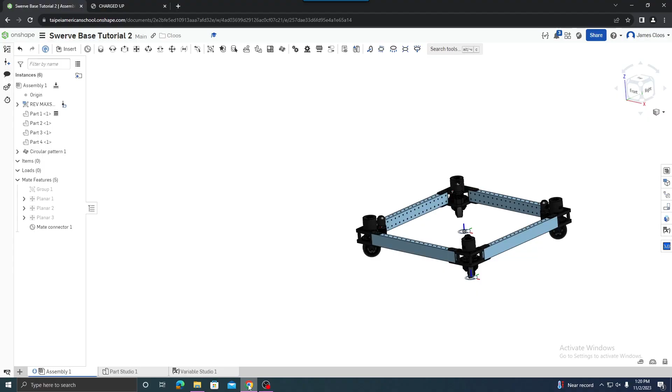Right, for the next tutorial, I'm going to add bumpers into this CAD so that we can make the bumpers, and also so that we have accurate geometry if we're trying to make an intake or something like that. And the most important thing that you can do when you are starting to design bumpers is to RTFM. Every year the rules are different, and bumpers are particularly hard to change, so if you make them wrong and you show up at a competition, there's a good chance that you're not going to be competing.

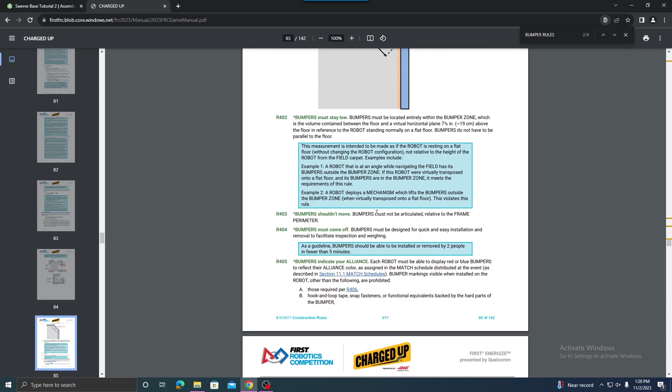So I am going to search the manual for bumper rules and jump down to section 9.4, and there's a couple of important pieces of information in here that we need to look at. First being this bumpers must stay low rule, is that the bumpers cannot be more than 7.5 inches above the floor. So that's one thing to keep in mind.

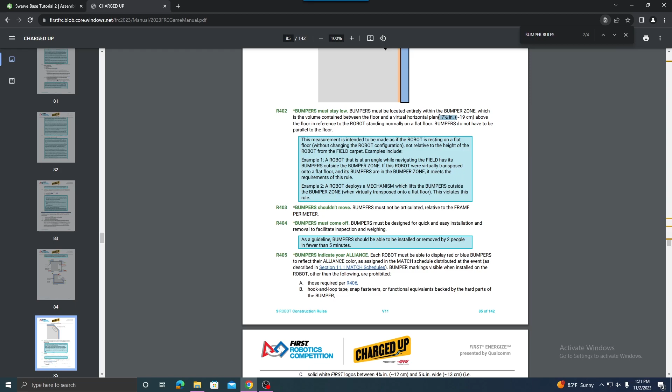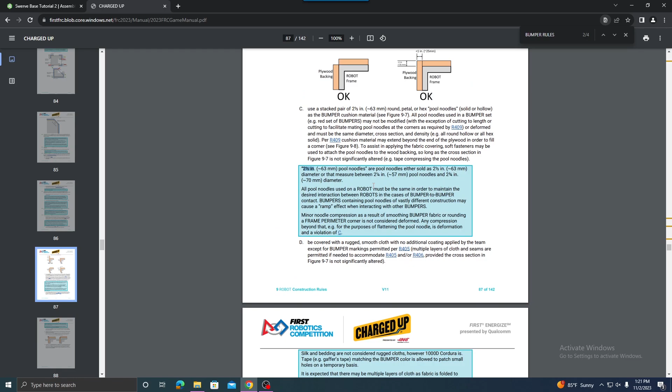Other things that we need to consider are the bumper construction. Our bumper should be approximately 19 millimeters, but this is going to depend on what kind of wood you have. They need to be 5 inches plus or minus half an inch tall. I'm going to make mine just 5 inches exactly, but there's some wiggle room there. And that should be about it. The pool noodles are approximately 2.5 inches, but I'm going to be focusing on the wood today.

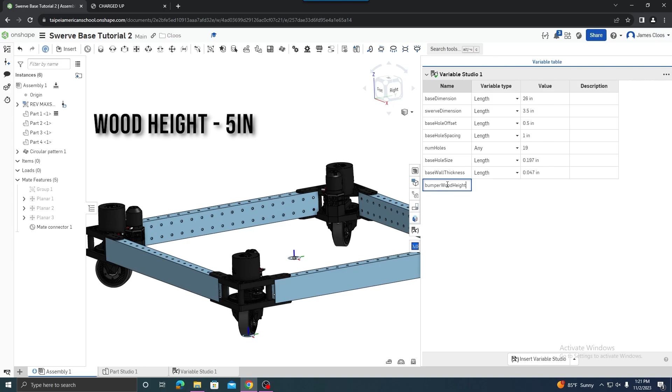So going back to our assembly, I'm going to make some variables over here. The first will be bumper wood height. That'll be how tall the bumpers are. Bumper wood height. Oh, I already had it. 5 inches. Next, I'm going to do bumper wood thickness, which will be, in our case, I went upstairs and measured the wood, and the closest that we have is 18 millimeters. I think that will be just fine.

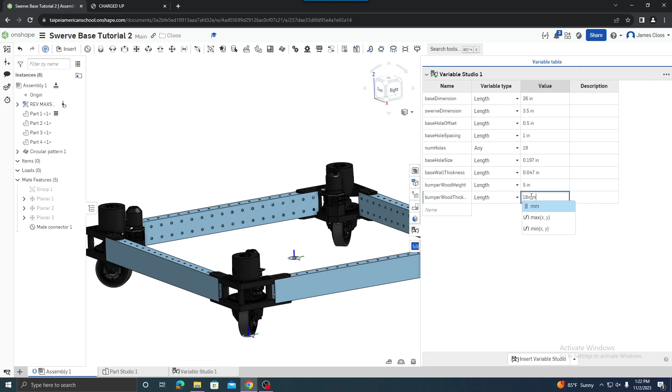And then I need to know kind of how far from the floor to the bottom of my bumpers, which I'll call bumper floor offset. I'm going to try 1.5 inches for now. This will be adjustable, so I can always come back and change that.

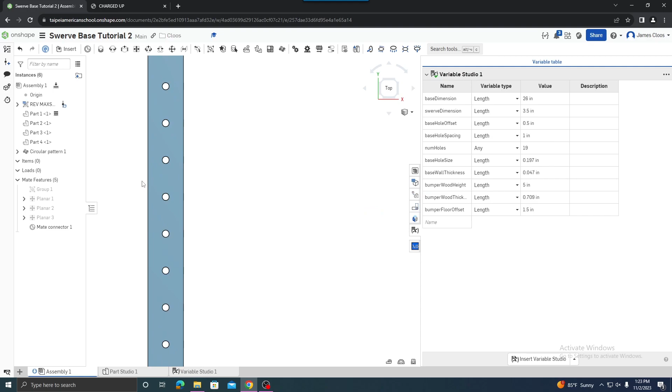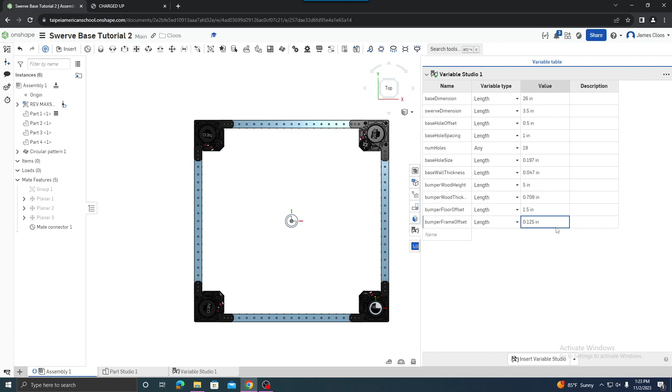And then finally, we don't want to make our bumpers the exact size of the frame perimeter. That may seem counterintuitive, but because we have to wrap cloth around the bumper as well, we need to leave a small gap in between the outside of the frame perimeter and where the bumper starts. So I'm going to call this bumper frame offset, and this we can play around with, but I'm going to set it to 1/8 of an inch for right now, and we can always change that if that's too big or something like that.

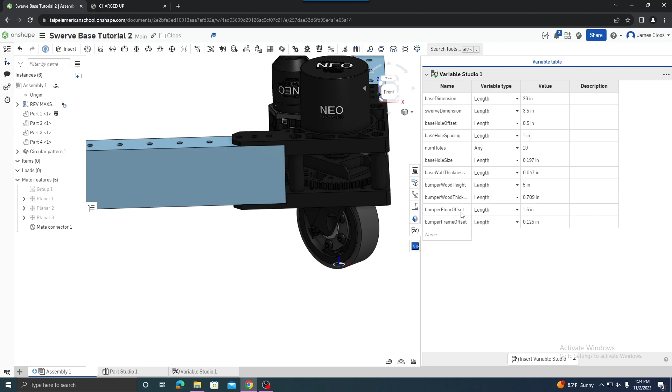Okay, so the other thing that we have to consider here is that we need to know where the floor is. If this robot's sitting on the floor, how do we find that information? And Onshape, thankfully, on the bottom of the swerve modules has a little mate connector here that tells us where the floor contact point is. So we're going to be using that. I'm going to make a new part studio now with reference to the floor, so that we can use this bumper floor offset to set the height of our bumpers.

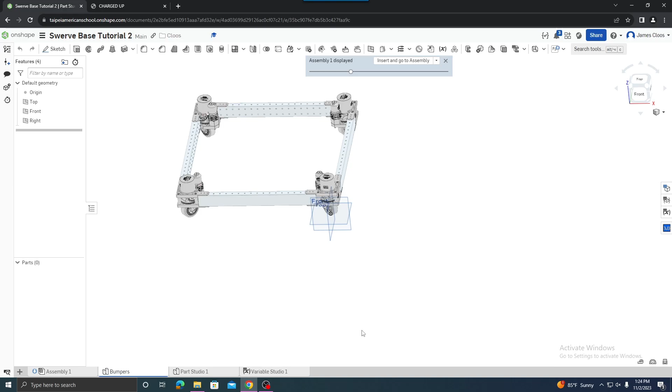So I'm going to right click on that mate connector. I am going to do create part studio in context, hit the check mark up here, and I'm ready to start. So I'm also going to rename this to make everyone's life easier. I'm going to call this bumpers. Alright, so the first thing, I'm going to just make a couple sketches so that I can use those sketches to make more sketches to draw the bumpers.

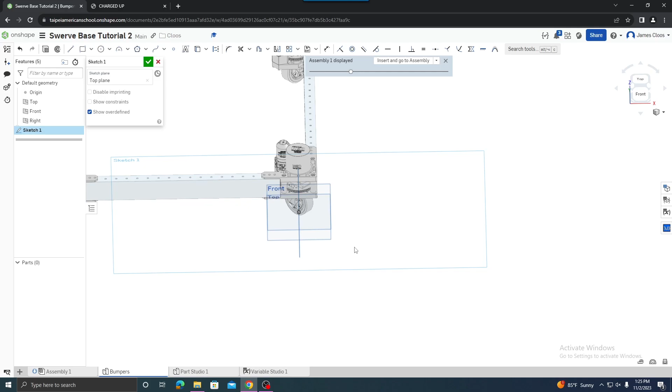So I'm going to start a sketch on this top plane here. Now I could click here to look at the top. I could also just hit the N key to look at the top of my drawing. I'm going to add a rectangle right now over the top, and this is going to represent where the inside of my bumpers are, and I'm going to dimension this now using the D key. This distance will be bumper frame offset.

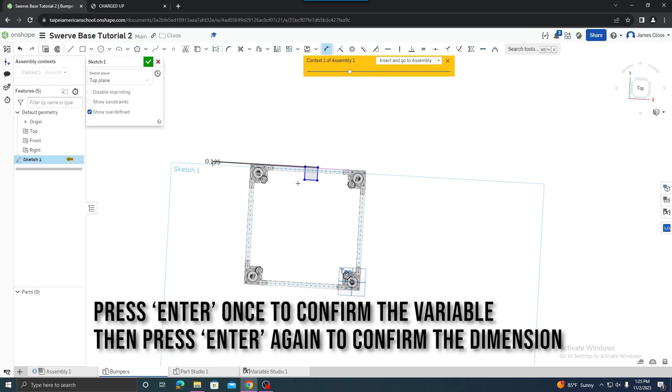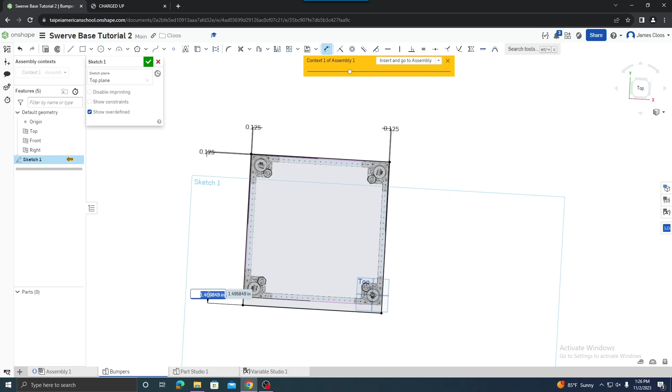Alright, I need to resize my rectangle now. And I'm going to just keep dimensioning all around. Bumper frame offset. Bumper frame offset. And the last one, bumper frame offset.

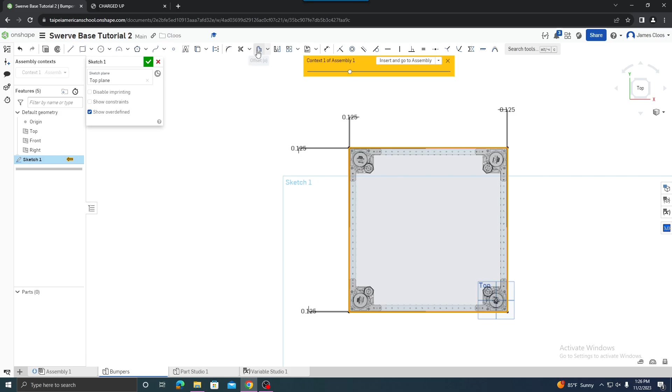So if I'm looking at this from the top view now, there should be a slight gap between the box channel and where my wood will go. Next up, I'm going to select all that I just drew, and offset it using the offset tool, or the O key.

This is important because of the way we're slotting our bumpers together. If our wood is 19 millimeters or 18.5, we want to know that exact distance so that it fits together nicely, or else they won't be very strong.

This sketch represents where my bumpers will be, but I don't want to start extruding this yet. I need to actually draw from a side or front view, so I'll go ahead and exit this sketch by clicking the check mark.

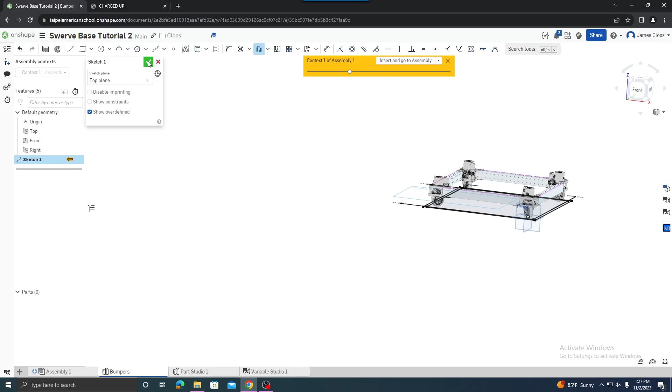I'm going to make a new sketch. I'd like to sketch on that 1/8 offset area. I don't have a plane for that, so I'm going to add one in. I'll select the plane tool here. By default, I think it is mid-plane.

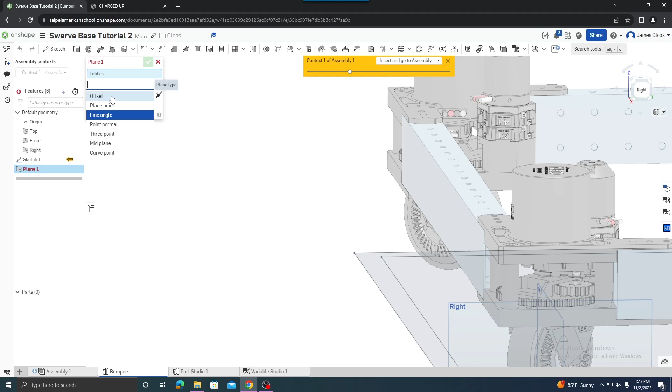We want to switch to line angle, and I can select this line here. You'll see that added a plane that is offset that 1/8 of an inch. So I'll go ahead and hit the check mark and start a new sketch on this plane.

Our bumper basically is going to look something like this, so that it can slot together. But I'm going to break this up into multiple steps. So I'm going to start. Let me delete all this now.

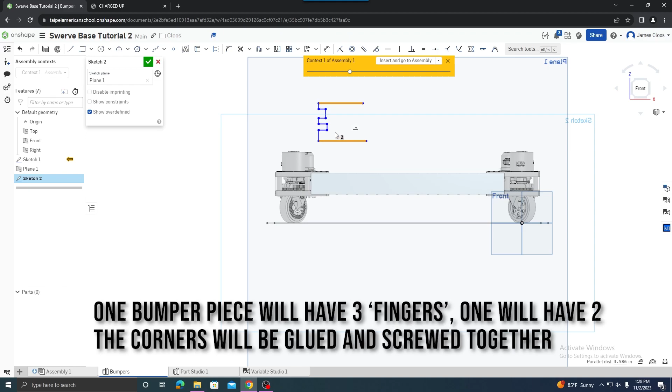I'm going to start by just doing a rectangle, and then I'll draw those fingers on. So drawing a rectangle here, I'm going to add my dimensions, starting off with from the floor - this will be bumper floor offset.

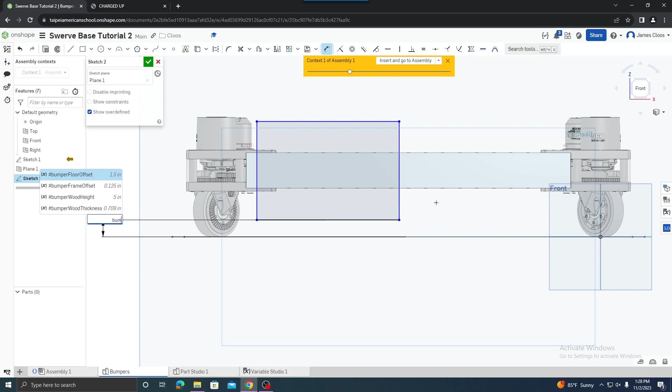That will set the bottom of our bumper to be the right height off the floor. Next, I'm going to add the height of the bumper here - so that will be bumper wood height.

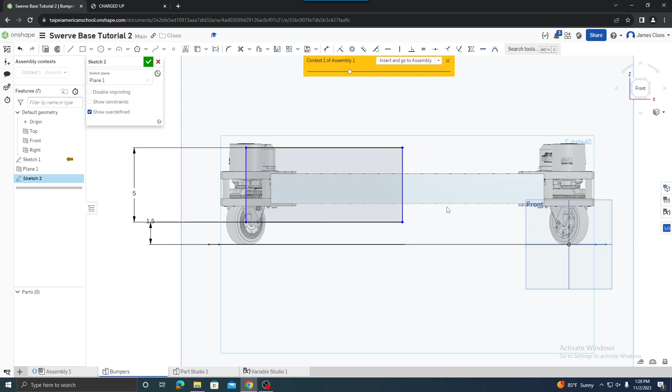Next, I need to place this bumper in the center. I should have said I'm doing 4-part bumpers, so each corner is protected by a bumper.

One way to do this is I can find my midpoint here by hovering on this line. I will find my midpoint. I can select the bottom point of my bumper, and I am going to make that vertical, pressing the V key. That's good. Now the other question is, how far over does this go?

I'm going to also use the vertical command here by selecting this inside corner and the bottom corner, hitting the vertical button, and I have my nice bumper set up.

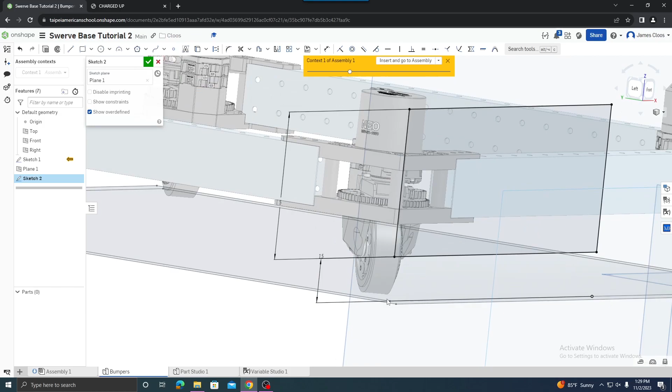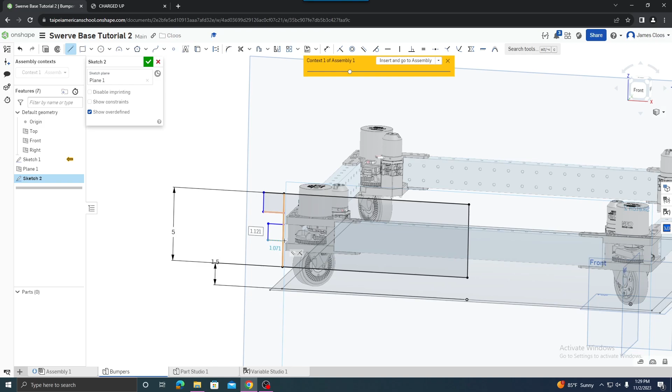After this, I'm going to add my teeth in here. I'll do this kind of sloppily first, and then go in and add my relations. So I'm just going to draw my 3 boxes. You could also use mirroring here, but I'll do the full step.

So how do I get these all black before I proceed? I'm going to select my 3 points here and make them vertical to each other. Next, I'm going to select these 3, and make them equal to each other - I could use the E key there.

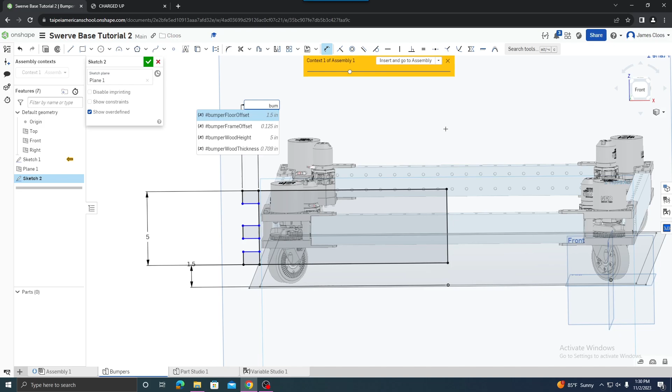I'm going to start adding some dimensions. I'm going to dimension this to be - I'm not going to type in 18 millimeters here. I'm going to type in bumper wood thickness, so that in the future if I change this it will automatically update.

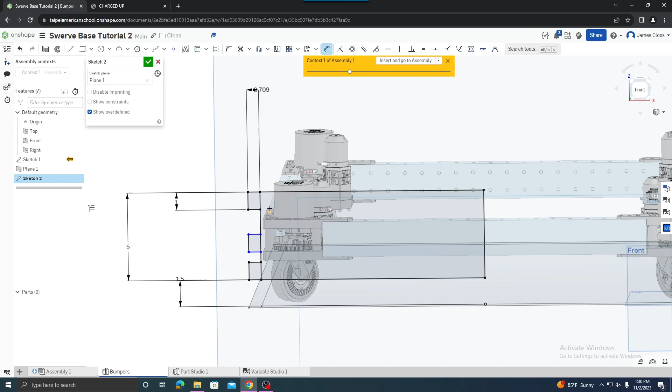Great, and so we're almost here. I still need to set the height of these, and this I can say bumper_wood_height divided by 5. Why 5? I have 1, 2, 3, 4, 5 total spaces.

The last piece of the puzzle is I need to get this centered. There's a bunch of different ways I could do this. One would be I could add a point in the middle of this.

And then I could find, okay - add a point over in the middle of this as well. And then I can select these two and set them to be horizontal. That would be one way that works fine.

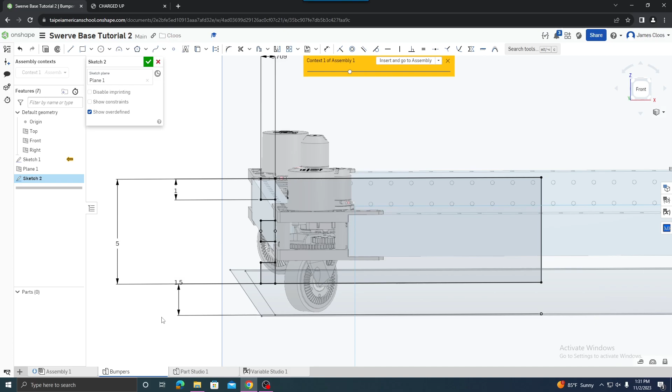Another way I could do this would be to add a construction line between here and here, and set these two to be equal as well. So both of those ways would work, or there are lots more.

Okay, and then to make my life a little bit easier, I'm going to use this trim tool, and I'm just going to cut out...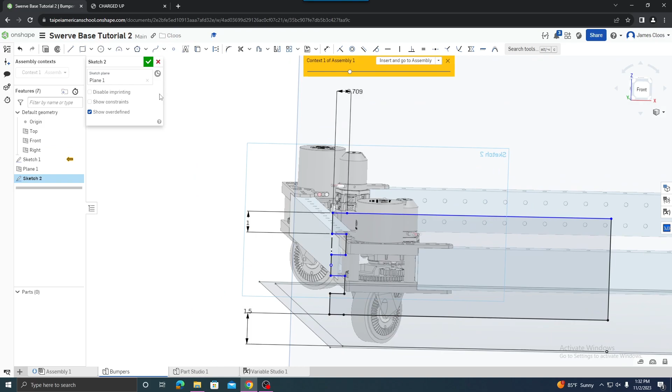Oh no, that ruined my sketch. Oh, it messed up the height. Okay, I'm going to reset that height then. I'm going to dimension this to this as bumper wood height.

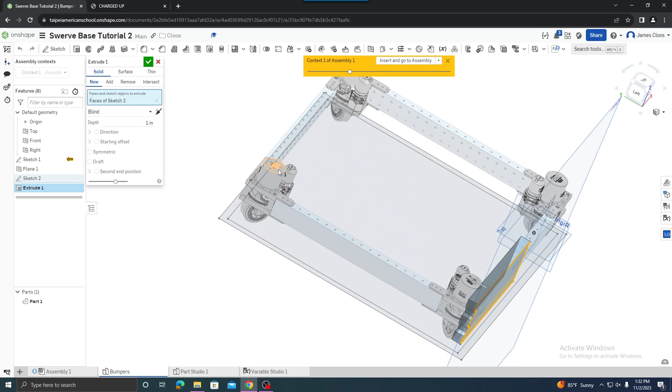All right, so that's all black now. I can proceed on. I'm going to extrude here. Don't want to go that way - I want to go the opposite direction, so I'm going to hit the flip button. And instead of 1 inch, I'm going to extrude it out bumper wood thickness.

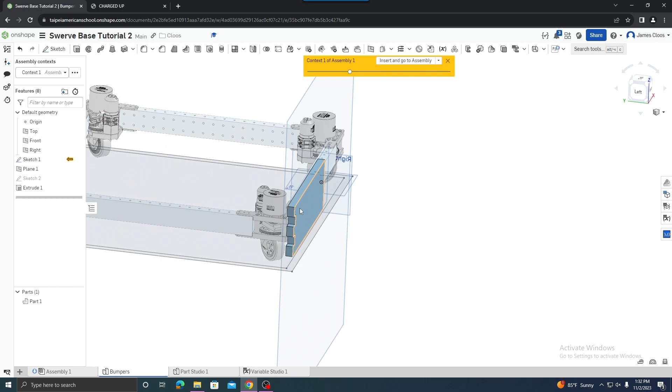All right, and I have a nice piece of bumper wood. I need to add another piece over here. This one's a little easier. I don't need to make any new planes. In fact, I'm going to hide this old plane by right-clicking on it and selecting Hide All Planes.

There we go. And for this piece, I'm just going to start a sketch. I'm going to start it on one of these surfaces. Doesn't really matter which one, but I'll choose this one. And for this, I'm going to just trace out what I want.

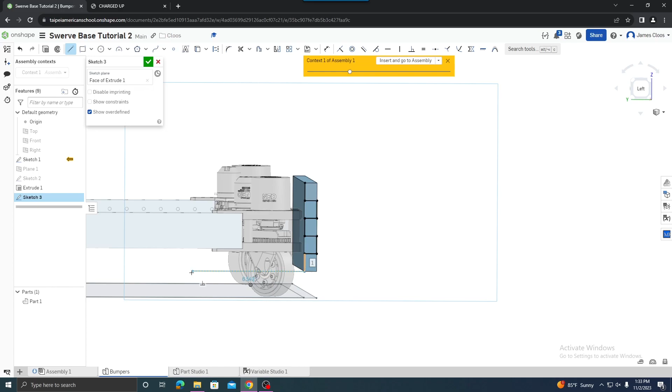So I'm going to go over here. 1, 2, 3, 4, 5, 6, 7, 8, 9, 10. I'm going to go over, up, making sure that I stay vertical and horizontal.

All right, and I'm almost done. I just need to get this over to the midpoint. So just like last time, I can select this, I can select that. I'm going to hit vertical. That would be one way to do it.

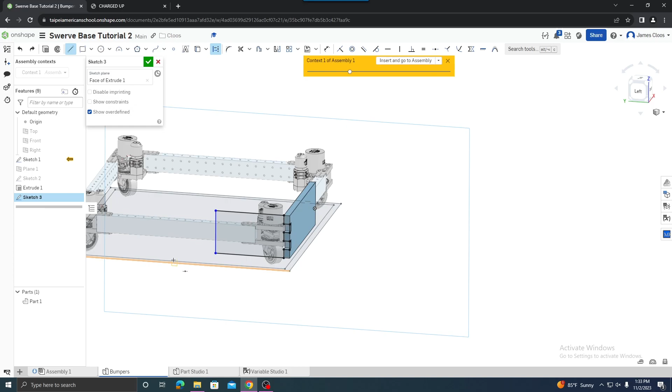If you wanted a little more tangible method, I could also draw a construction line from here to here, and I could set that to be vertical.

Or, you know, if for some reason you wanted a little gap between the two bumpers, you could also draw a vertical line here and then set some kind of dimension here. Like if you wanted a 1/16 gap so that your bumpers fit together nicer, that's also an option. I'm not too worried about that, so I'm just going to...

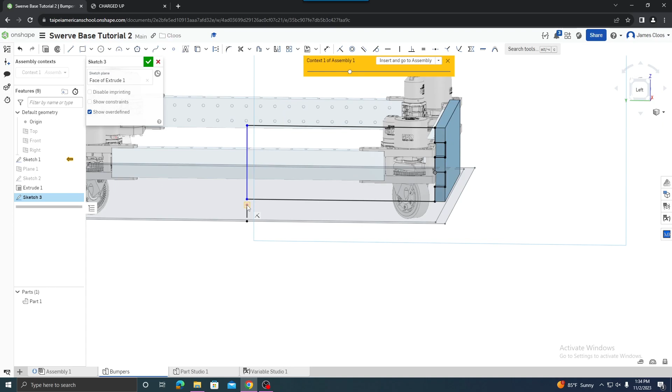Do it like that. All right, now that I have this, I can extrude. Note that I'll do up to face here and select that so that it fills it in. Note that I do not want to do the add option here, because that would make just one giant block and all of my work on those fingers would be ruined.

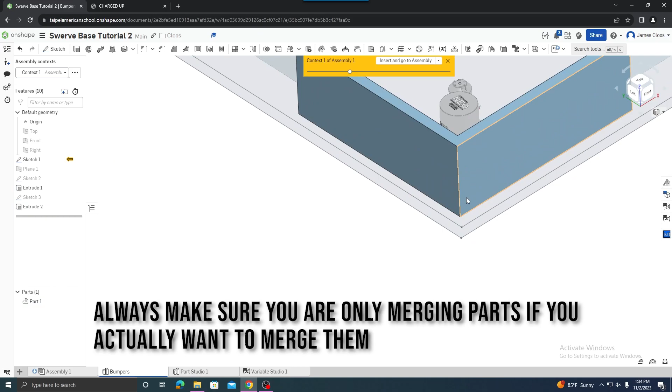I really want to do new, because these are two different parts. These are two different pieces of wood. Great, so these are almost ready.

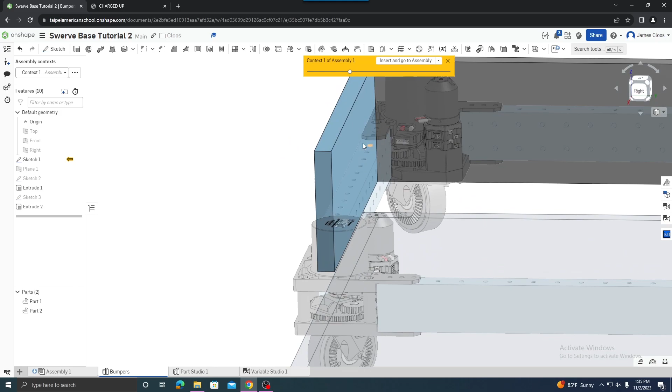I could rotate these around if I wanted to, but for right now I want to actually add in some brackets or some way of mounting these bumpers to the box channel. So let's take a look at that.

I'm just going to make kind of a dummy. I'm going to pretend like I'm bending a piece of metal or something to fit the bumpers. But you'll want to have some discussions about how exactly you want to mount your bumpers to the frame. It's important that they are durable and easily removable and repairable.

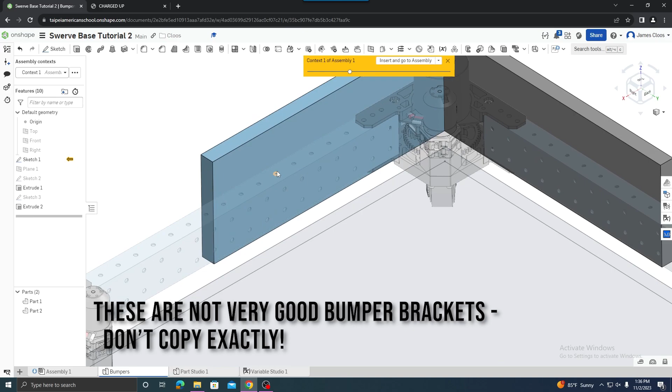But for this one, I just want to show you how I can add the holes in the right place on the bumper, depending on my bracket that I decide with.

So let's make a new sketch. I'm going to mount these using this hole here maybe. So I'll start sketching on top of here, and I'm going to just draw a rectangle around here.

To center this rectangle now, I'm going to draw a construction line from the center of the circle to the center of the rectangle, and I will make that - I want to say that's horizontal? No, not horizontal, vertical. This will change depending on which side you start drawing on.

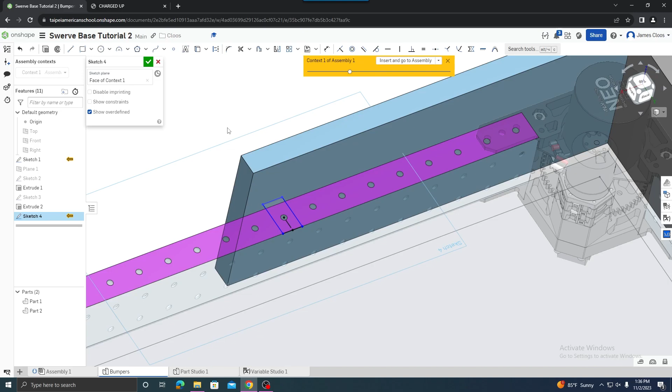Next, this line should probably go all the way out to the bumpers. I could do this point and this plane, and select pierce. Oh, maybe this point, this line, pierce? No, okay. So how do I get this out to the proper space?

I can make another sketch, I guess. What I will do for now, I don't want to spend too much time on this, is I'm just going to add this dimension. Here, yeah, I'll just add this dimension. I'm going to say 1 plus bumper frame offset. So that should adjust to be - oh, okay, it doesn't like 1, I'm going to say 1 inch plus bumper frame offset. Great, okay, it was a little awkward, but we'll get there.

Finally, I still see some blue, and that is because I didn't set my width yet, so I will come in here and say, hey, let's make this - I don't know, you should probably add a variable here as well, but I'll just say 1 inch. Why not? Okay, so I'm going to extrude this out now.

I'm going to pretend I'm making this out of 1/8 angle aluminum or something like that. So I'm going to extrude. You'll notice that it's not getting a hole here, so I actually want to delete these faces of sketch 4, and I'm just going to click specifically on what I want, which is here and here.

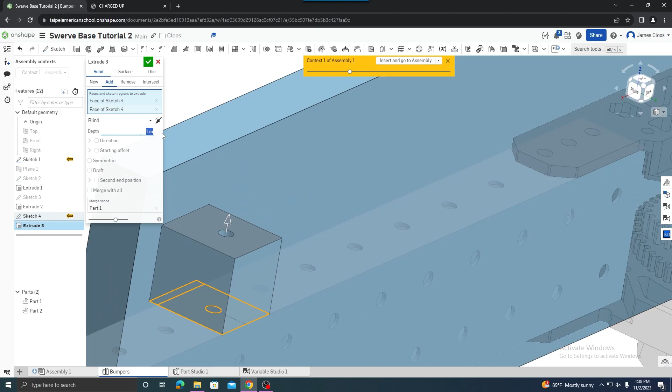Thickness, again, you probably want to set up a variable for this, but I'm not actually going to use these brackets, it's just for an illustration. Pull that up 1/8 of an inch. Great, and now for the vertical piece, I'm going to sketch on - I guess I'll just sketch on the bumper.

Oh, I think I made a mistake. I said add instead of new, so this became part of the bumper. I definitely want to go back and make sure that I selected new. It should be a different color in that piece.

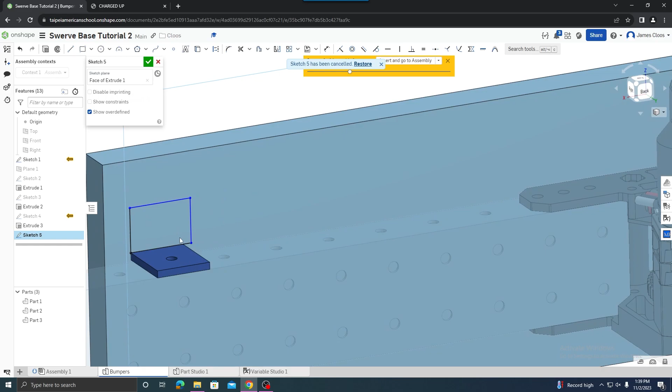Now I'm going to do another sketch on here. I will draw a rectangle coming up like that. This can slide over, so I'm going to drag it back until it pops into place. I'll set a height on this as well to be 1 inch.

I should add a couple of holes here. I could do this a couple of different ways, but I'll do it like this. I'm going to draw a construction line across here, and another construction line across here. I'll add a circle there and mirror that circle across like that. Finally, I can set a dimension here, something easy to remember, maybe like 5/8.

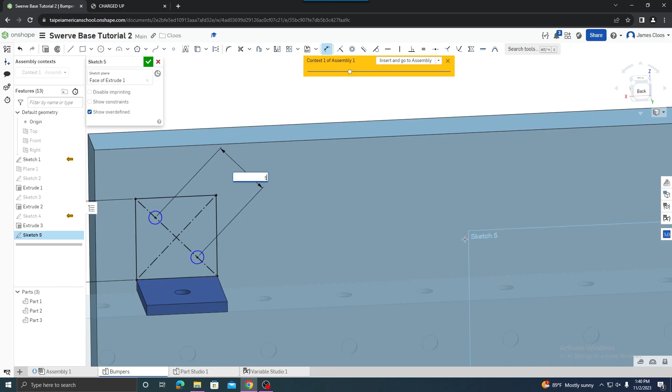The screws that we generally use are 4mm, so we use M4 bolts or M5 bolts, whatever, but that's a nice size. And then finally, I'm going to extrude this 1/8 of an inch.

Now, I would like this to join my first part that I made, but not the bumper. So when I go to add here, for my merge scope, I'm going to select just this bottom piece. Great, okay, so this is a pretty workable bracket.

I do need to add my holes into the bumper. One way that I can do this is, I'm pretty sure that I can just start a new extrude. I'm going to switch to remove to make sure that I'm removing material, and then I'm going to just click.

No, that's not going to work. Okay, never mind.

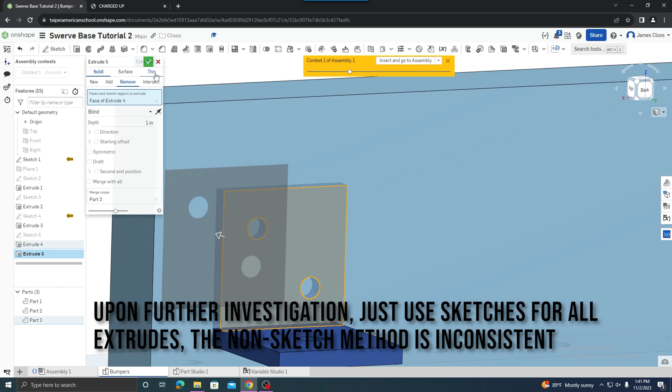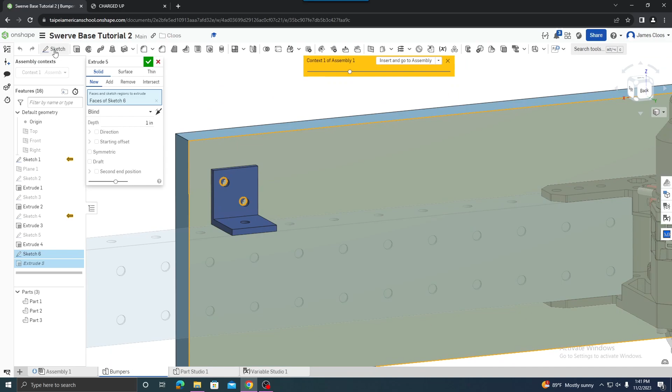Let's make a new sketch on the bumper. I'm going to select these holes and then press the U key. Those holes should be in there now. I can remove this by extruding, remove, and I'm just going to say through all. Hit the check mark. All right, and I am good to go.

For really strong bumpers, you'd want to have 2 mounting brackets on each side. For this illustration, I'm just going to do 1. I need to do the same thing over here for the other side.

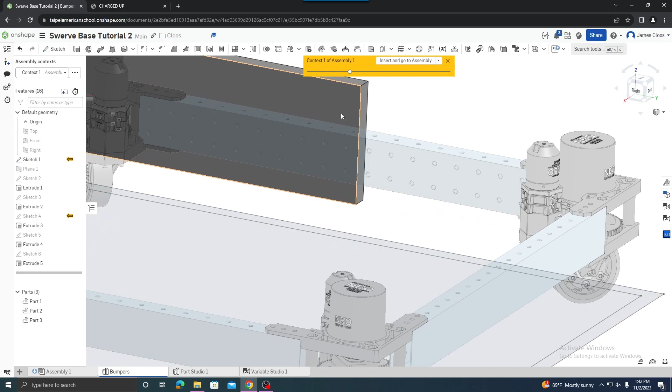It might be nice - I'm going to be a little lazy here. Instead of drawing this over and over again, I'm going to try mirroring them all over. So I'll show you how to do that.

Before I can mirror or rotate anything, I need to set up my plane. I'm going to go up here to the new plane tool. I'll set that up between these 2 box channels. I need to switch this back to mid plane. I'll get my plane in the middle.

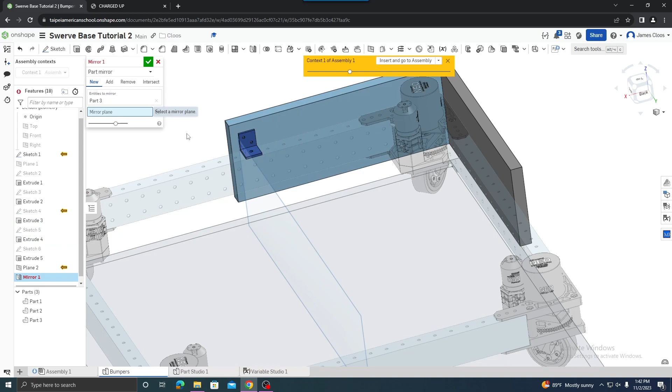Very nice. I'm going to now use my mirror tool here. I'm going to mirror this bracket across this plane, and that should line up nicely with the hole. Just double checking - yep, looks good.

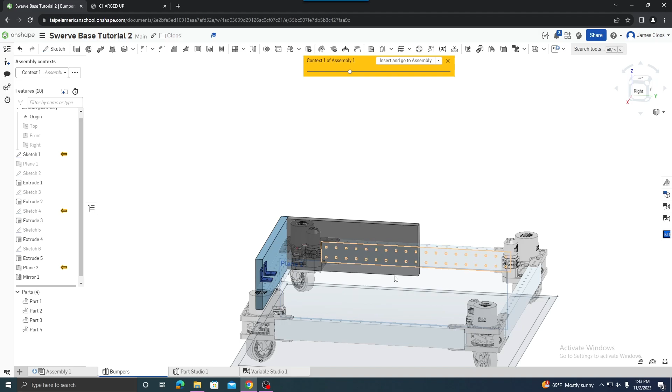All right, up next, because I have a square base, I could just rotate these around, so I'm going to do that real quick. To rotate, you need an axis, so I'm going to add that in the middle of my bot. Normally, we put that origin in the middle of the bot so we could do that, but because we started it from this part down here, I can't do that, so I've got to add that back in.

I'm going to make a sketch on this Plane 2, because I know it's in the middle. I'm going to make a line. It doesn't really matter where I put it, but I'll put that there.

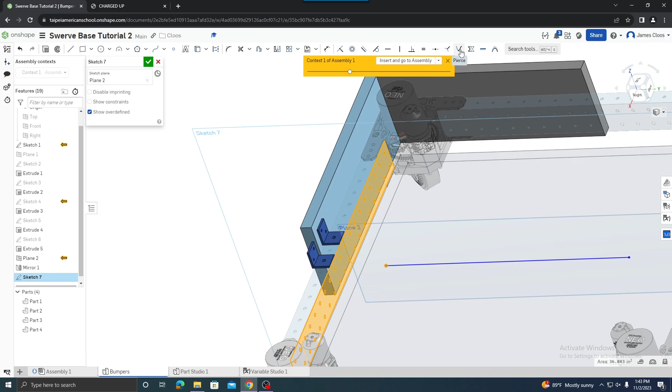I think I can go here and select pierce. That should work - nope, okay, that's not working. Maybe this bumper in this point, pierce. This and this coincident - ah, that worked. Okay, coincident, not pierce. I'll do this to the other side as well. I'm going to select this face, this point, make it coincident.

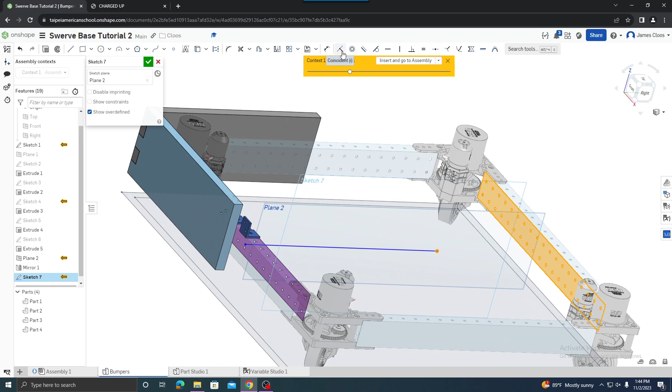Nice. And for the rotational axis, I'm going to find the midpoint here and draw my line vertical. Okay, I can exit the sketch now. I have my rotational axis.

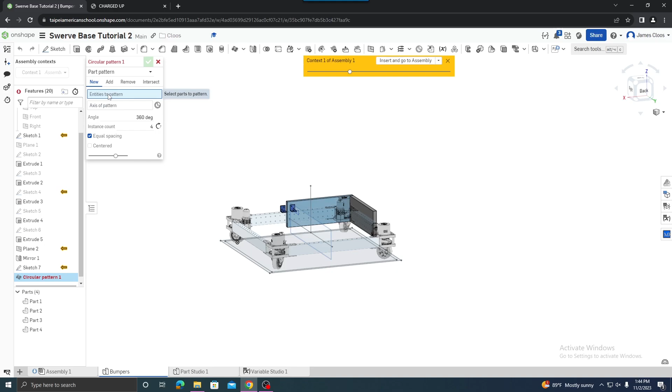I'm going to go up here to under linear pattern, circular pattern. Entities to pattern, I'm going to pattern my brackets. Axis of pattern will be this line. You can see that added in all four, or all 8 of my brackets. I'll go ahead and hit the check mark.

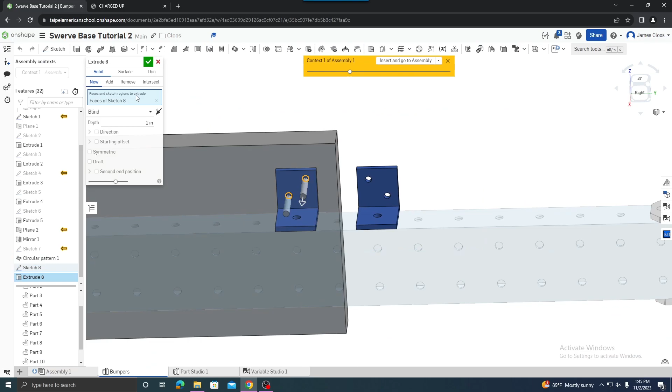Last step, I need to add in the holes over here. I'm going to make a sketch on this bumper and use these 2 holes with the use tool here. I'm going to make a nice extruded remove through all, and I got my holes in my bumper.

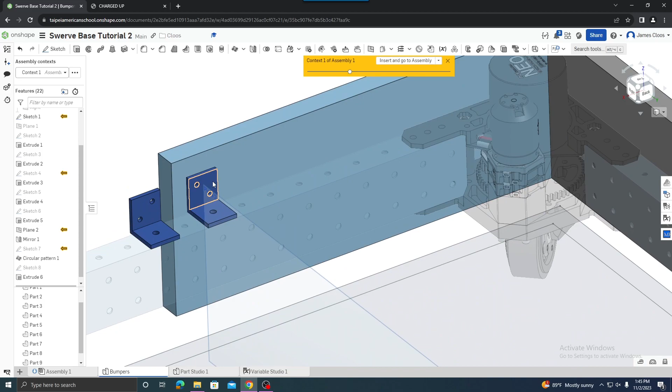If possible, you should really use 4 brackets per bumper if space allows. I'm not entirely sure about the placement of these so far out to the side. If you only use 2 per segment, more in the middle might be nice, so this corner is more supported. But that's a discussion for another day.

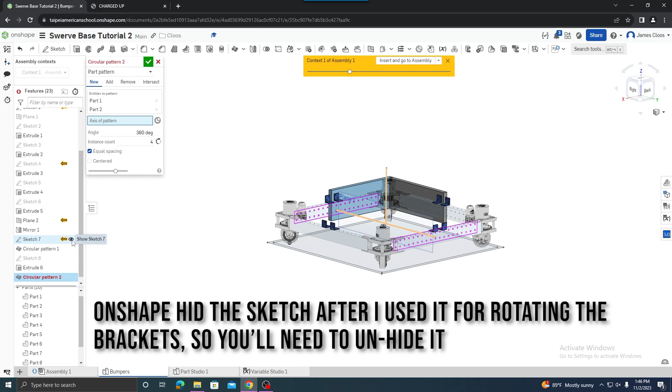Next, I am going to do another rotation of these wooden panels now that I have all the holes in them. I didn't want to rotate them before I put the holes in. So I'm going back up to my circular pattern, selecting my bumpers. My axis will be, it hid my sketch, so I need to show my sketch here. Now I can select that, and I have my 8 total pieces.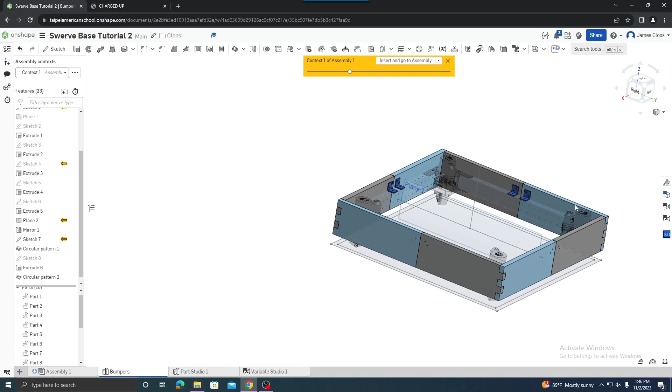Then the final step I think is going to be adding the pool noodles, but first, just to show you how nice this is now that I've set up all my variables. If I go back to my variable table, if I thought those bumpers were a little too low and wanted to protect motors or something inside, I could change this to 2 inches, and you'll see that raised everything up really easily.

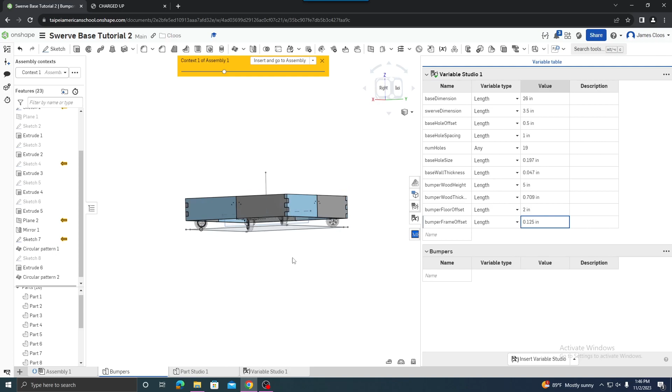If my wood was, I go up and measure it and it's actually 19 millimeters, like it should be. You can see that expanded it out now.

If my frame offset was too small, it's probably not the case, but just for illustration purposes, I could change that to 0.5, and you can see that just changed the whole offset, also changing the design of the brackets. So that's pretty nice.

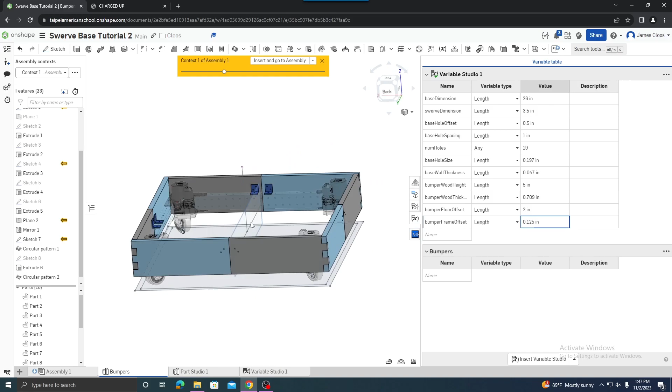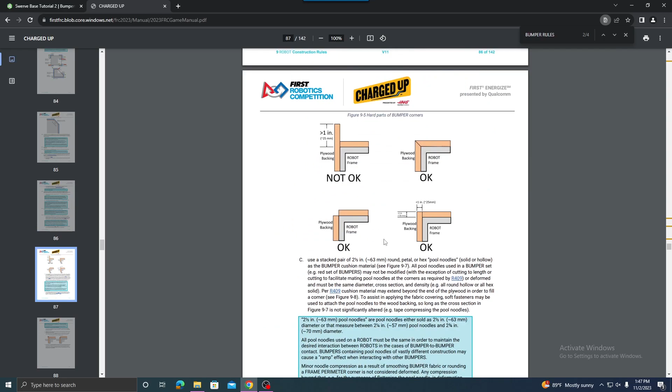Yeah, so that's pretty much it. Last step is I'm going to add those pool noodles. Like we looked at before, those are 2.5 inches, but again, always double check all of the official documents for each year.

And we're going to sweep those pool noodles around the bumper. So to do that, I'm going to make a sketch on any side, doesn't matter, but I'll do it over here.

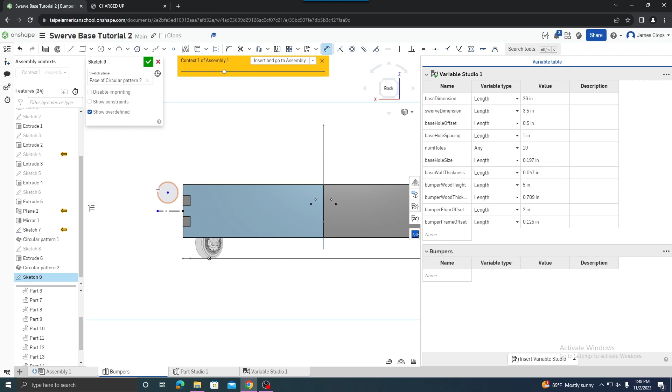I'm going to add in a line to make this symmetrical, and I'm going to add in my circle. I'll set that to be 2.5 inches. And I'm going to set my line here in my circle to be tangent, and my bumper and my circle to be tangent as well.

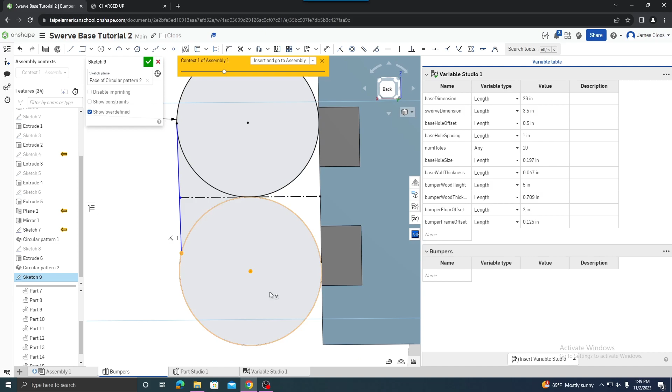Next, I'm going to mirror these over. I'll just add this so it looks a little bit nicer. Now I would like this to be all the way out at the edge here. I'm going to select this and make them horizontal from each other. Same down here, horizontal. Alright, and that should make a nice little bumper fabric that I can wrap around.

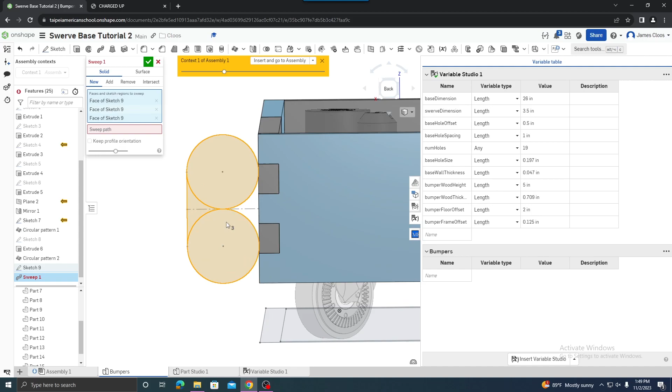To do this now, I need to exit my sketch. I'm going to hit the check mark and select the sweep tool. I am going to sweep my circle, my outside bit, and my other circle. The sweep path will be either of these two rectangles down here. So I'll go here, here, here, and here. And then I can hit the check. Alright, and that gave me these nice bumpers.

I can use these patterns here to make my DXFs to cut out on the water jet. Now that I've finished my bumpers, I actually want to put them into my assembly so that other people working on the bot can use them as reference and they won't steal my holes for mounting things.

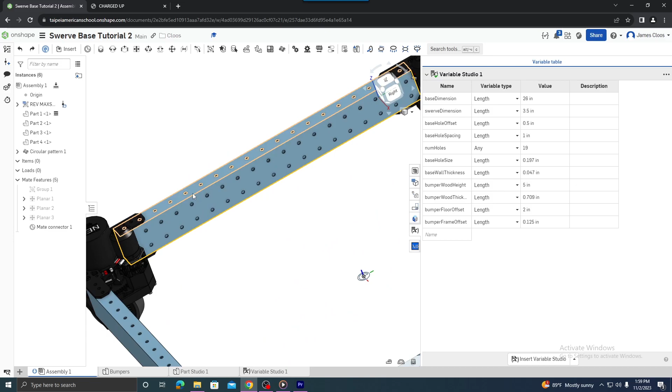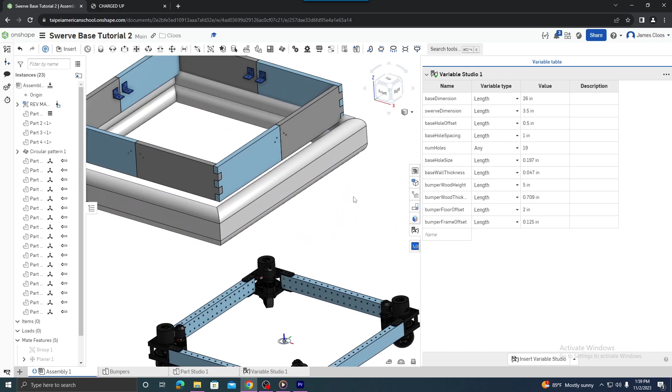To do that, I'm going to hit this insert button. I'm going to select bumpers, and I'll just put them somewhere convenient, not too close to the other things. The reason I'm doing this is because right now, even though I put these in here, they're still flexible. They haven't been fixed together.

So one thing I can do is select everything. I'm going to search for the group button here, and then I need to hit the check mark. Make sure you hit the check mark. Now it's a functioning unit.

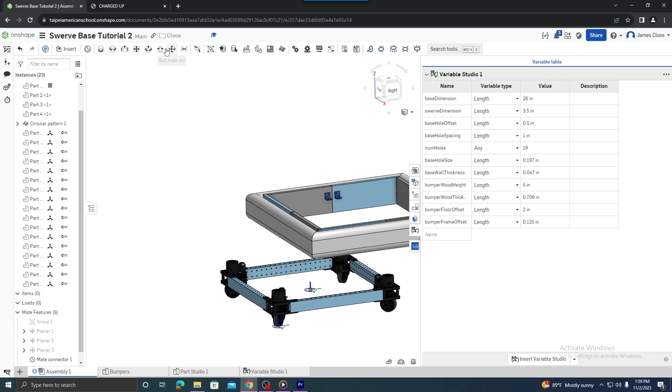To mate these together, I'm going to do a planar mate. I'll go from the bottom of my bracket to the top of my box channel.

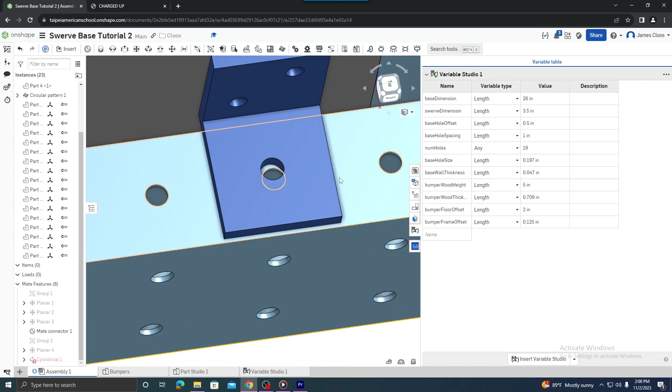Next, I need to do these holes. So I will do a cylindrical mate, and I'm going to try to scooch this in the right place so I can see which hole it goes to. That seem about right? Yeah, that seems right to me. Alright, so I will go this hole to this hole. Check mark. Alright, and then maybe the other one over here.

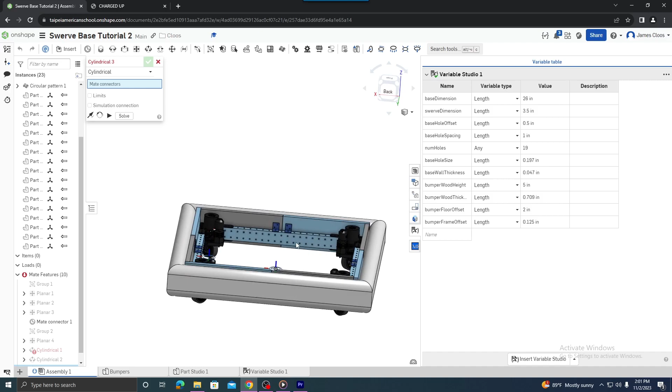I will go cylindrical mate this hole to that hole. Alright, and that's that. All my bumpers are nicely mounted on my frame. Should be pretty secure. Maybe next I will add in a belly pan.